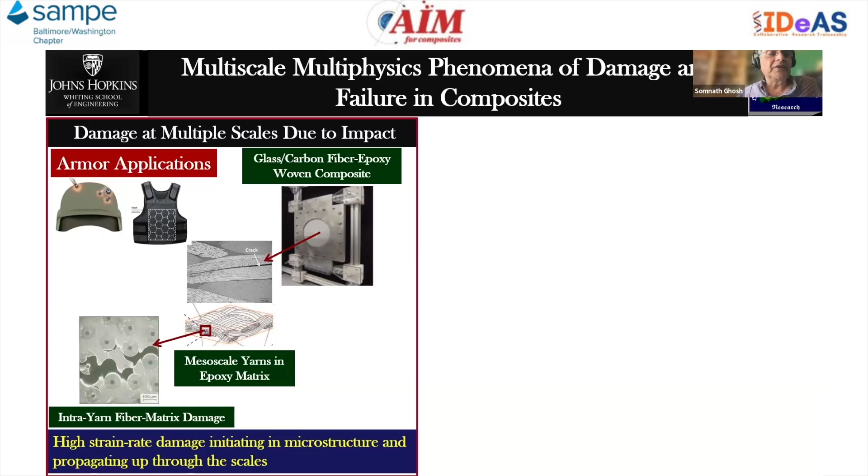These are mesoscale yarns in an epoxy matrix, and within each of these yarns, I see intra-yarn fiber matrix composites. Typically when you have damage, high strain rate damage initiates in the microstructure and propagates through the scales to cause failure of the overall structure at the macroscopic level. So this is a phenomenon of multiple scales involved in the damage process.

What I'm going to focus on today is the non-destructive evaluation of evolving damage sensing in structural components. For example, this is an aircraft made of composite material. Typically, the failure or damage process starts deep down in the microstructure in the form of fiber breakage, matrix cracking, and so on, and then it moves up the scales to manifest as the overall failure of the structure.

Typically, different NDE techniques have been used. For example, this shows a built-in sensor network involving actuation and measurement, consisting of a sensor network together with diagnostic hardware and analysis software. This other one corresponds to sensor data acquired through eddy currents. Typically, these sensor signals are processed in a posteriori fashion, meaning after the operation.

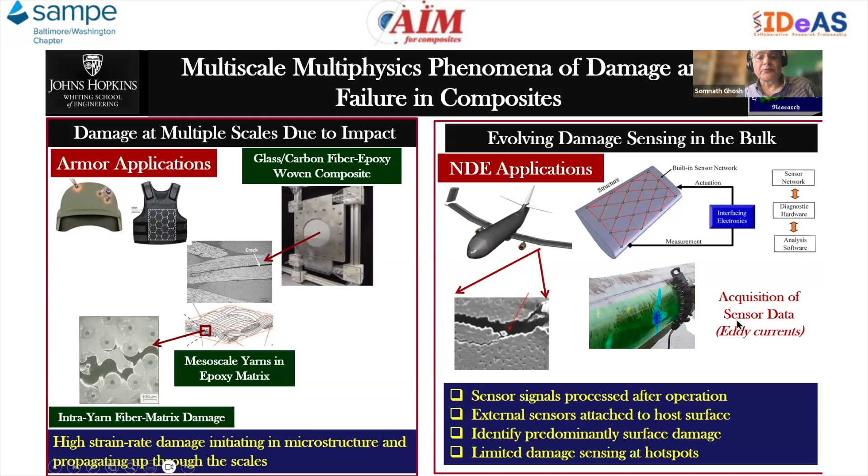So the objectives of model-based predictive platforms for composite structures and materials have multiple prongs. The first is multi-scale damage evolution in composite structures, with multi-level and mesostructural linkages existing in these evolutions.

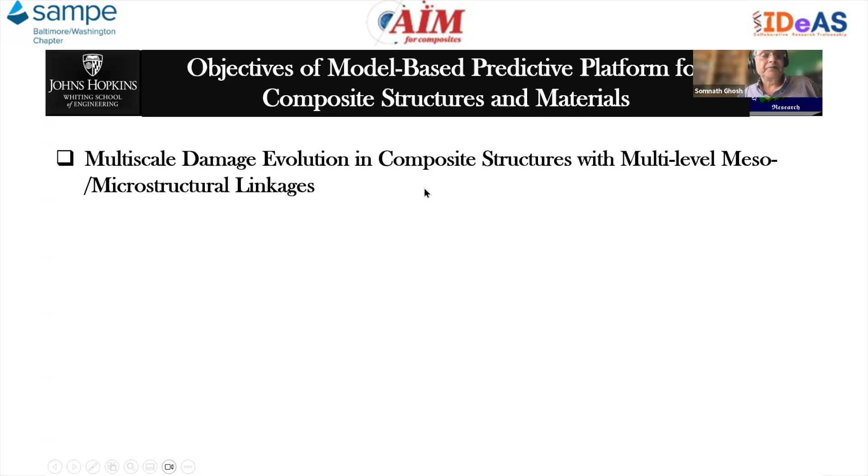The next objective is that ubiquitous damage sensing is necessary, especially subsurface at the source, because by the time damage manifests at the surface, it may have already grown to failure.

And the third objective of these model-based platforms is to understand the evolving phenomena such that one can facilitate location-specific material and especially microstructure design.

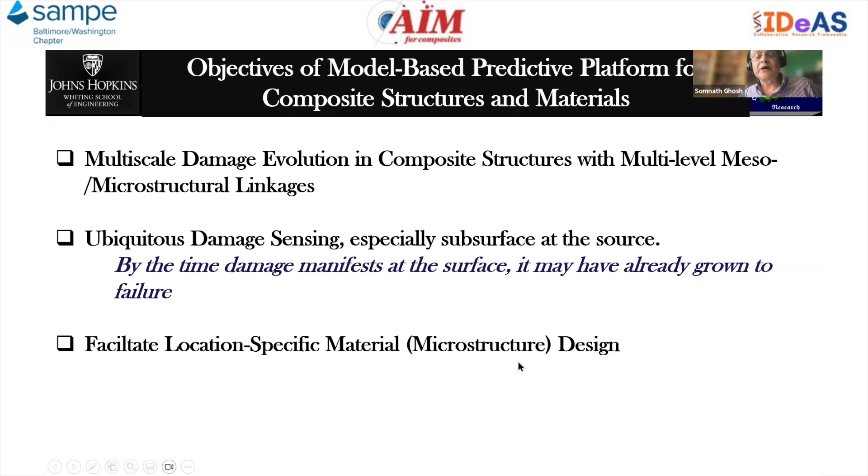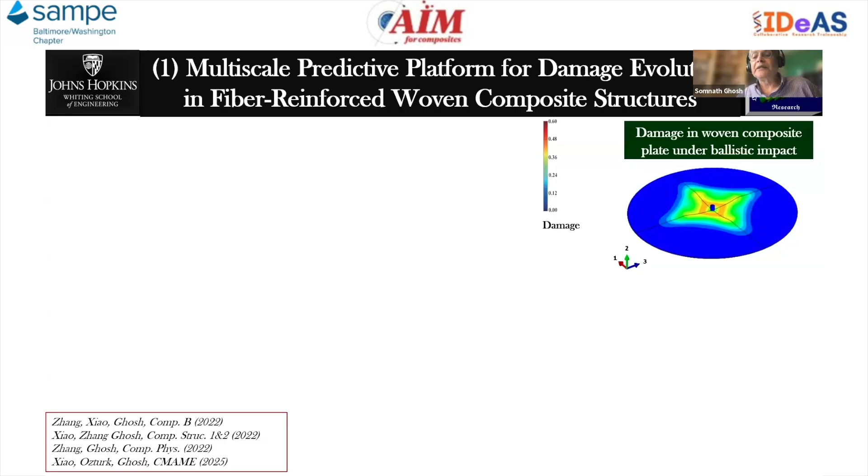Now this corresponds to a multi-scale predictive platform, a pure predictive platform that I'm talking about for damage evolution in fiber reinforced woven composite structures. So like I showed before, this corresponds to a woven composite plate under ballistic impact.

Actually, we worked on this together with Army researchers who were working at the University of Delaware at that time.

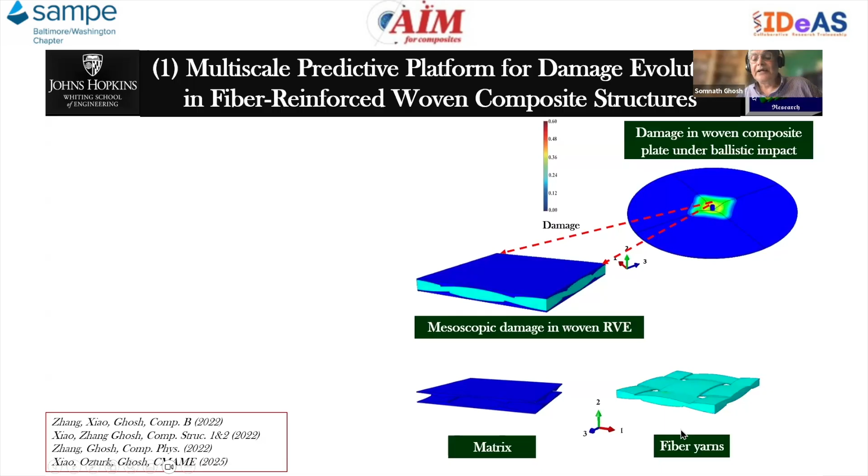So at the mesoscale, this corresponds to the evolution of mesoscopic damage in the woven RVE. And if I look further down, I see this corresponds to the matrix with matrix damage, and then there are these fiber yarns. And if I look inside of these yarns, I do see this fiber matrix composite microstructure, and actually the damage is starting through mechanisms of matrix cracking, interfacial debonding, and such at this scale.

So the link between these scales is very important, because one really needs to connect the lower scale damage phenomena, or lower scale damage and failure phenomena, to the failure phenomena happening at the higher scales.

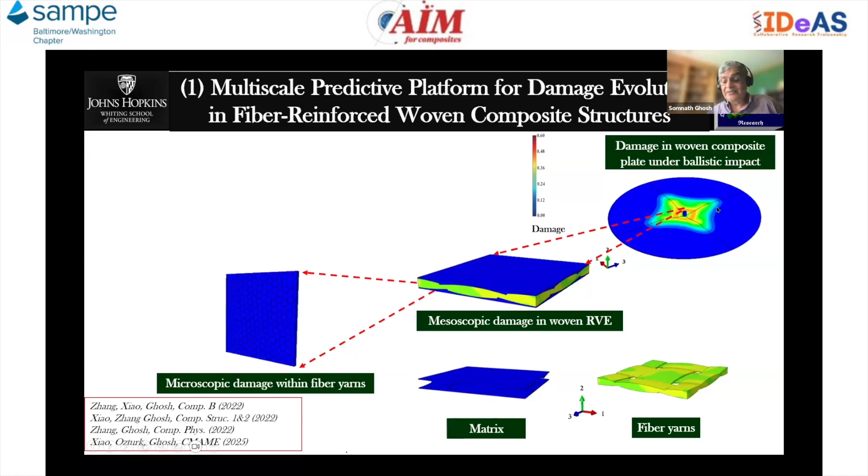Now, in order to get a fast, full field prediction, full field reconstruction of this coupled electromechanical damage fields, it's a good idea to incorporate machine learning, because machine learning has various good attributes for developing these fast, efficient surrogate models. So we can use certain machine learning techniques, and I'm going to go into that in detail.

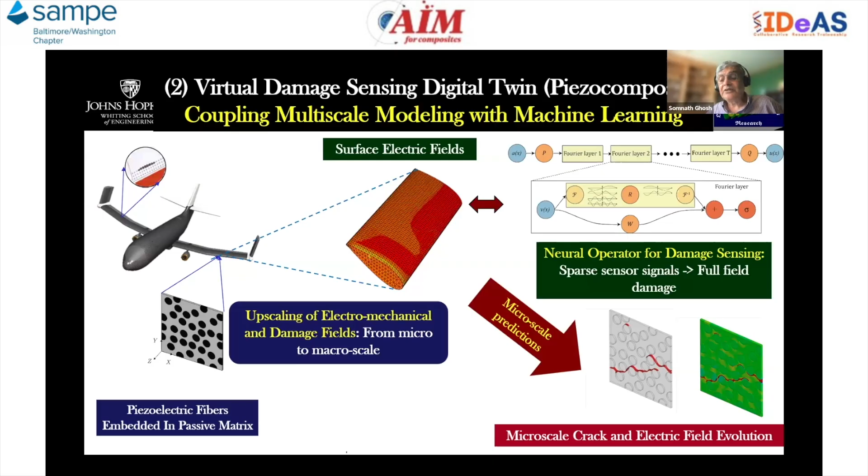When you connect these multiple scales, typically various homogenization methods have been used, and many of them suffer from a number of disadvantages. For example, many are not suitable for complex nonlinear material behavior, such as anisotropy, tension-compression asymmetry, that is typical for many of these materials, especially under fatigue load.

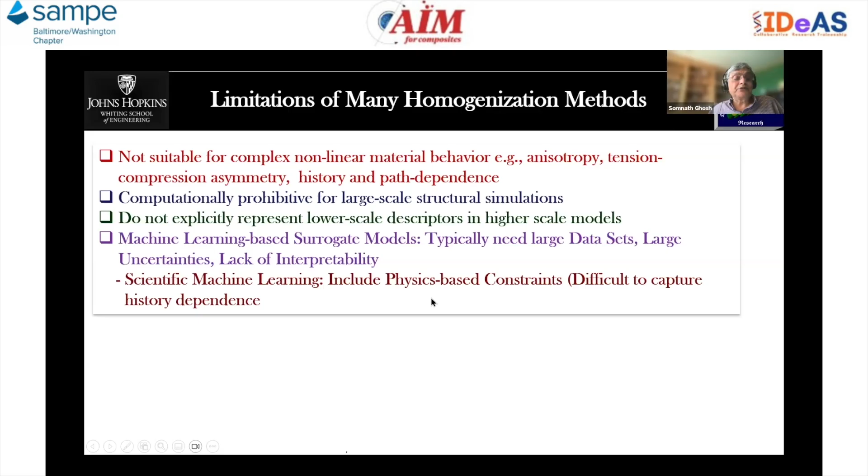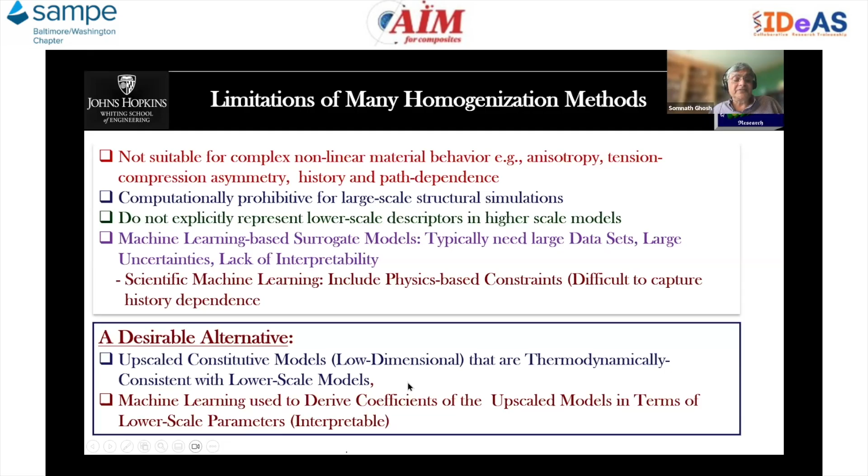History and path dependence. Many of them are computationally prohibitive for large-scale structural simulations and do not explicitly represent lower-scale descriptors in higher-scale models. Machine learning-based surrogate models typically need large data sets, have large uncertainties, and lack interpretability. Today there are scientific machine learning methods which include physics-based constraints, but many of them still suffer from the difficulty to capture history dependence.

A desirable alternative is to upscale constitutive models, which are low dimensional, that are thermodynamically consistent with lower scale models. Machine learning is used to derive coefficients of these models in terms of lower scale parameters, making them interpretable. This is something we've been working on, called parametrically upscaled constitutive models, or PUCMs. They represent higher scale constitutive models that are thermodynamically consistent with lower scale model responses for dissipative irreversible processes, with explicit parametric representation of lower scale morphology.

It could be, for example, crystallography or general morphological descriptors. We call them RAMPs. This is a canonical form. Now the overall form, including the set of higher scale state variables, for example strain rates, work, plastic work, temperature dependence, that evolve with deformation and failure, are governed by the second law. For example, one can use the Helmholtz free energy and minimize it to obtain this form.

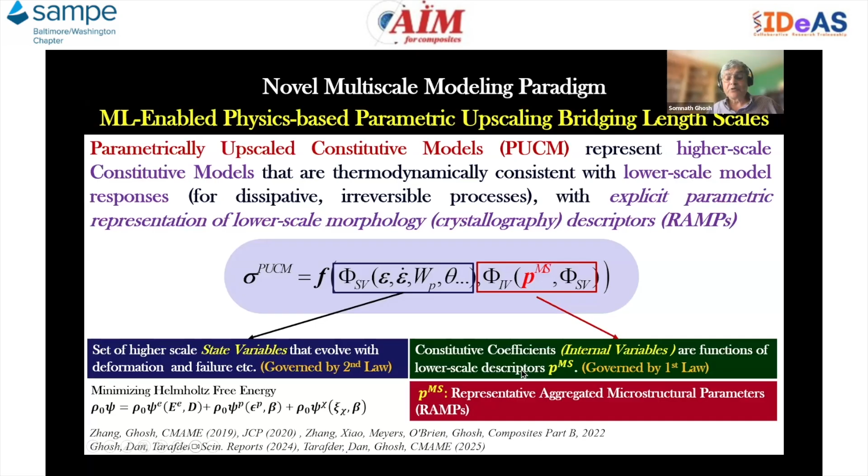But this is more important here: the constitutive coefficients are coefficients of internal variables. These are internal variables that are functions of lower scale descriptors. When I say lower scale descriptors, I'm addressing them as representative aggregated microstructural parameters, which we call RAMPs. The RAMPs represent lower scale descriptors, and I'm going to give an example of this. This part is governed by the first law.

To build the parametrically upscaled coupled constitutive damage mechanics models, what we need first is to identify the RAMPs, the representative aggregated microstructural parameters. We also need to, corresponding to given microstructural RVEs or statistically equivalent RVEs, create a microscale response database, which can come from micromechanical modeling.

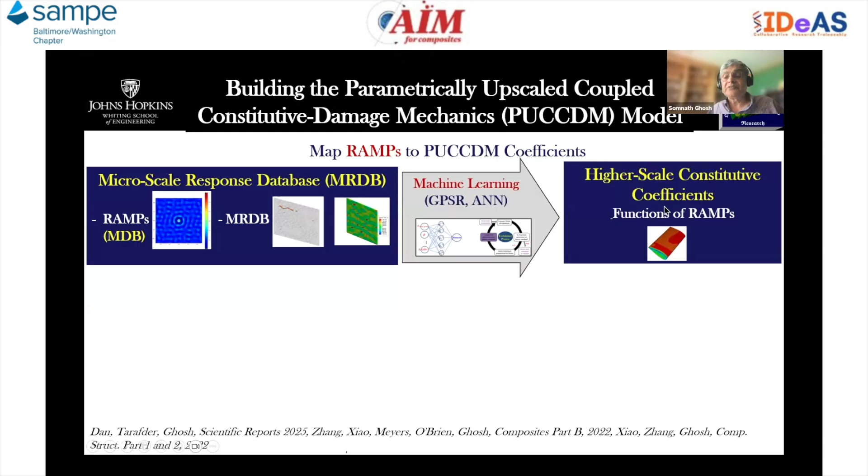We use this data together with machine learning, for example genetic programming based symbolic regression or ANN techniques, to generate these higher scale constitutive coefficients. The constitutive law itself is set by thermodynamical equivalence or consistency, but the coefficients, instead of doing an inverse analysis from experiments, we use machine learning to develop functional forms of these constitutive coefficients in terms of the RAMPs representing the lower scale material descriptors.

So the advantages are: machine learning tools create physics-informed constitutive parameters as functions of lower scale descriptors, making them interpretable. A much smaller database is required for training these constitutive parameters because of thermodynamically bound windows, and they're readily incorporated in commercial codes. As a matter of fact, we've been distributing some of our models through UMATs to our industrial collaborators. Reduced number of variables make them several orders of magnitude more efficient, but with very comparable accuracy.

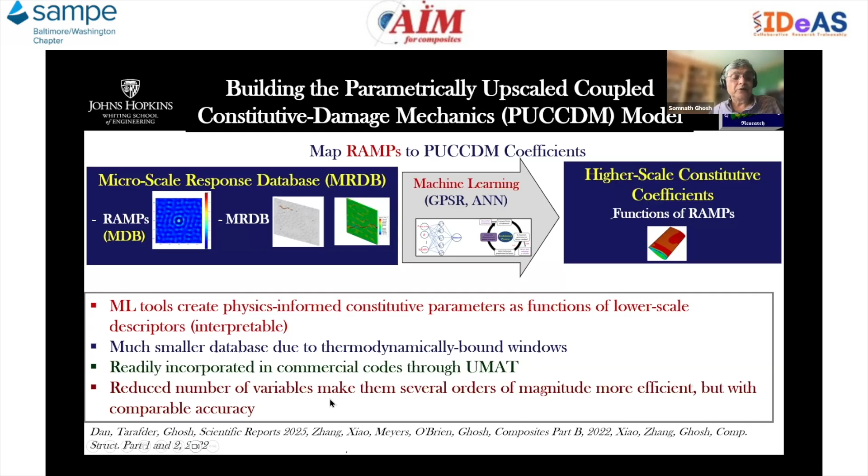So now to build this, it's a two-way approach. The first is the bottom-up, hierarchical approach. We start with the micromechanical models. We identify the micromechanical regions, statistically equivalent RVE regions. We identify the RAMPs, and we use these micromechanical models for generating the MRDB, the microscale response database.

Then we use machine learning to come up with these parametrically upscaled models. Once we have that, those models can be used to generate training data for machine learning based methods, and I'm going to use two types: one corresponds to LSTM methods, the other to neural operators, to basically predict the full field.

State variables corresponding to mechanical, electrical, as well as damage variables throughout the computational domain, using these neural operators. From that information, I can zoom in to generate microstructural damage fields or electrical fields. Importantly, I'm placing equivalent sensors, which can correspond to electrical field measurements at selected points on the surface. We've developed a genetic algorithms-based sensor network optimization tool to generate the optimal location and numbers of these sensors, so from a limited number of sensors we can generate the full field state variables in the computational domain. That's the top-down macro to micro analysis.

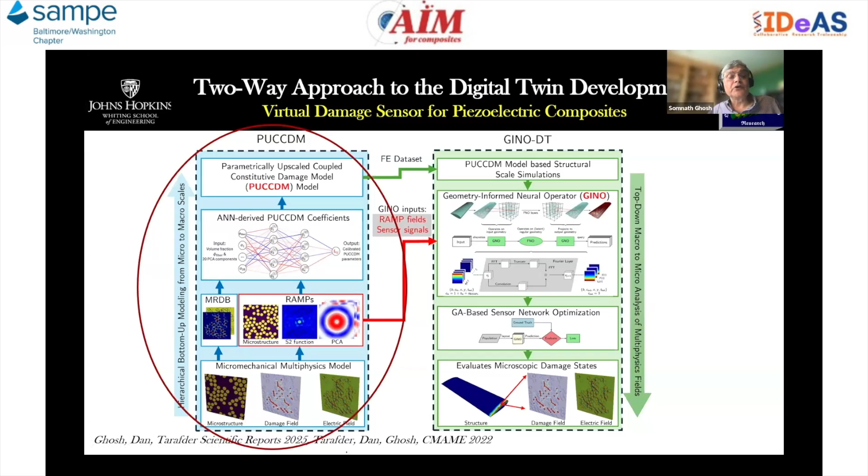I'm going to try to move through this a little fast because it's quite elaborate, this process. So this is the generation of these methods.

From the microstructure, we first do characterization and data generation methods. From that, we generate the RAMPs, the representative aggregated microstructural parameters. Then from the evolution of deformation, damage and electrical fields, we generate this microstructural response database. And then we use data-driven techniques plus thermodynamics.

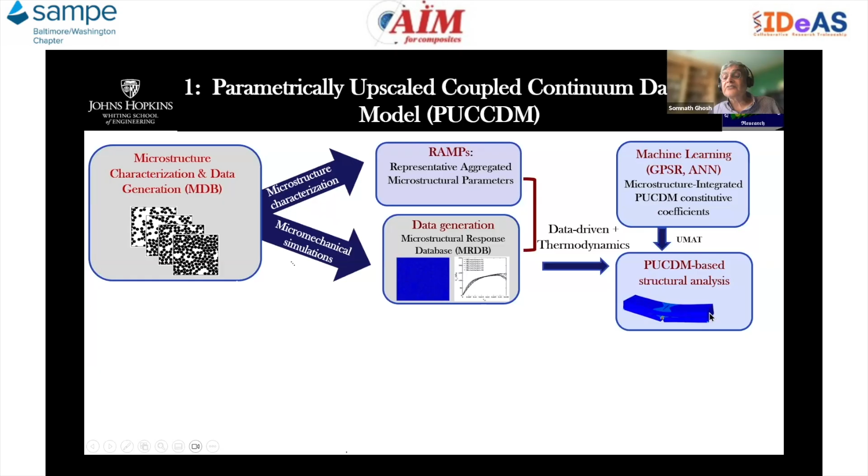The data-driven techniques will be necessary for my machine learning techniques to operate on, to generate these PUCCDM constitutive coefficients. Based on that, we will have the PUCCDM constitutive models that can be inserted in any structural analysis, to actually do the structural level analysis with direct linkages to the microstructure.

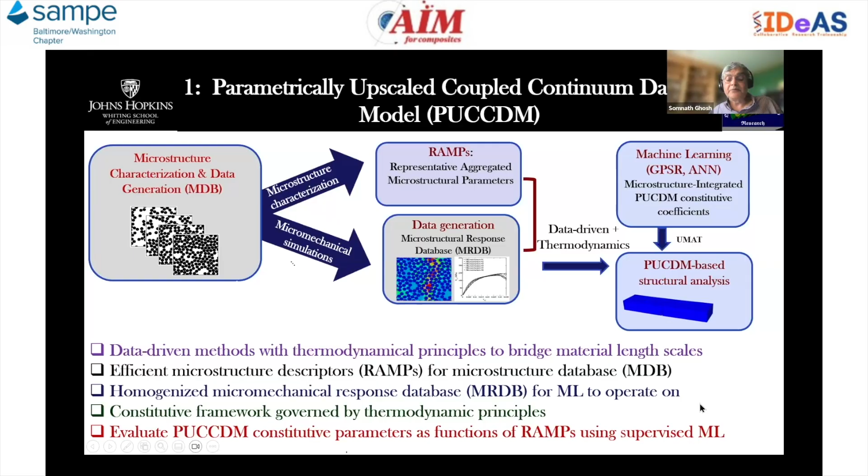The advantages are that data-driven methods with thermodynamic principles are used to bridge material length scales, with efficient microstructure descriptors in the form of RAMPs for the microstructure database, and a homogenized micromechanical response database for machine learning to operate on. The constitutive framework is governed by thermodynamic principles, and we evaluate the PUCCDM constitutive parameters as a function of RAMPs using supervised machine learning techniques.

A little bit about the micromechanical analysis. The micromechanics consists of the fibers, or multiple phases - the fibers in, let's say, a polymeric matrix. In this particular problem, I'm modeling it as an elastic, finite deformation elastic matrix material. So this is for the mechanical problem.

For the electrical problem, we have electrical fields associated with large strains, and damage due to electromechanical states because of interfacial debonding, fiber breakage, and matrix cracking. For the electrical field, we have an energetically consistent electrical crack face condition, where the electrical field can permeate through the medium in the crack gap.

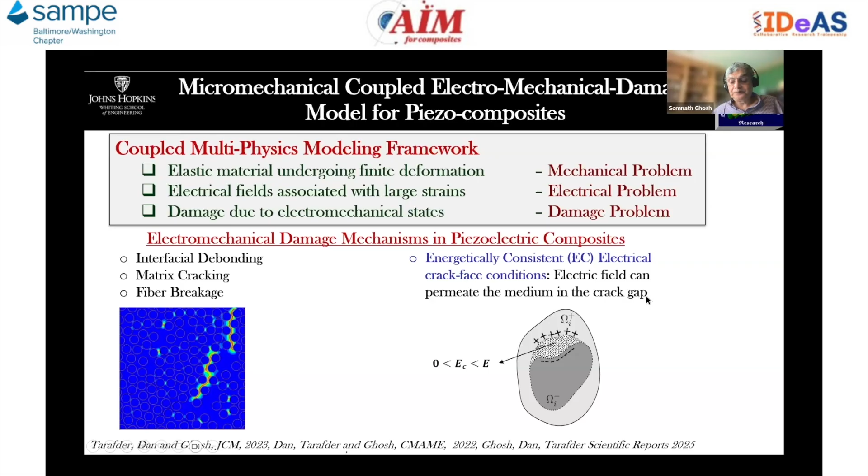We use a phase field model. A phase field model is a regularization of the sharp crack, as you can see here. The advantage of the phase field model for modeling matrix cracking, as well as this cohesive zone-based phase field model of the fiber matrix interface, is that in the matrix it implicitly tracks the crack path, eliminating the need to introduce cohesive elements in the general matrix, and the electrical crack face condition can be incorporated using the phase field order parameter.

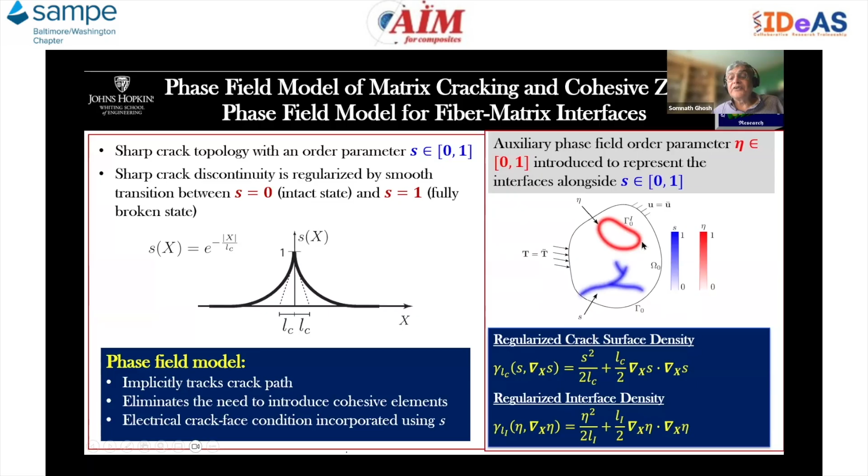The other advantage of the phase field is that I can introduce interfaces using the phase field, the other order parameter. One is the order parameter S, used for modeling matrix cracking - this is a regularized, diffuse crack. And this is a diffuse interpretation of the interface, using my variable eta to represent it.

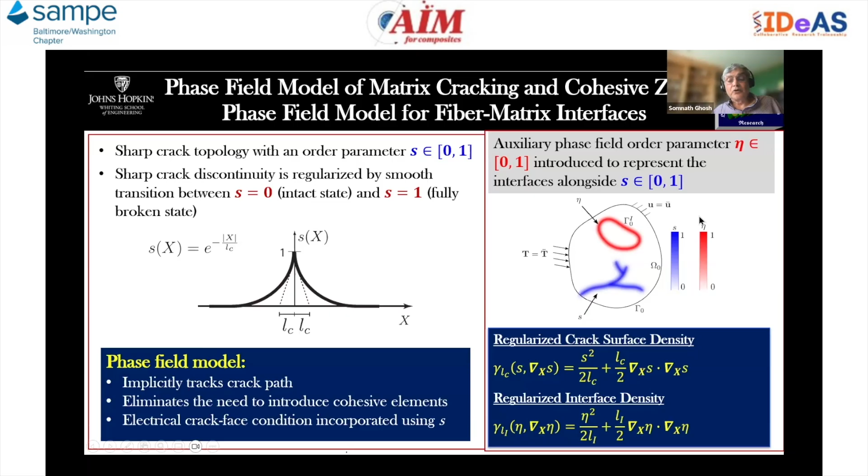The eta variable represents my interfaces corresponding to the fiber matrix interface. These are some of the kinematics that represent both the deformation as well as the gap opening due to interfacial decohesion. I don't have time to go into this.

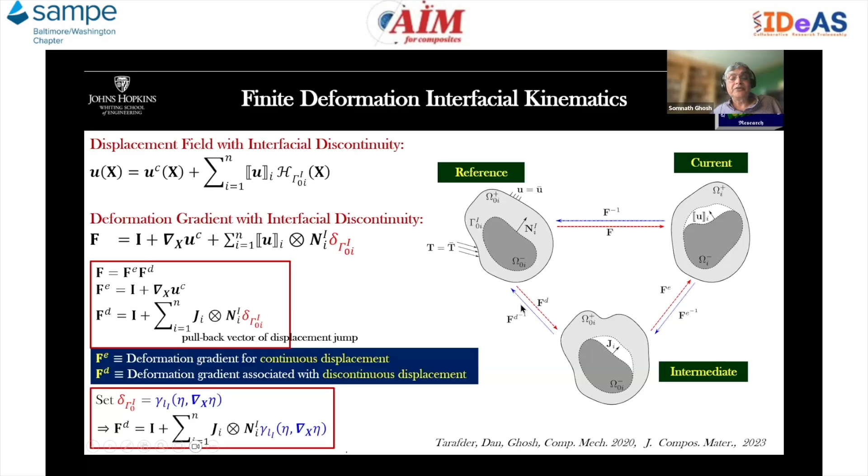These are the governing equations. There are three types of governing equations. One is the balance of linear momentum, or the equilibrium equation corresponding to the displacement field. These are all for finite deformation, as you can see - finite deformation, damage field, and it also couples the electrical field.

The electrical potential field is represented by the Gauss law, and the phase field balance equations correspond to the damage field in the microstructure, also representing the interfacial debonding.

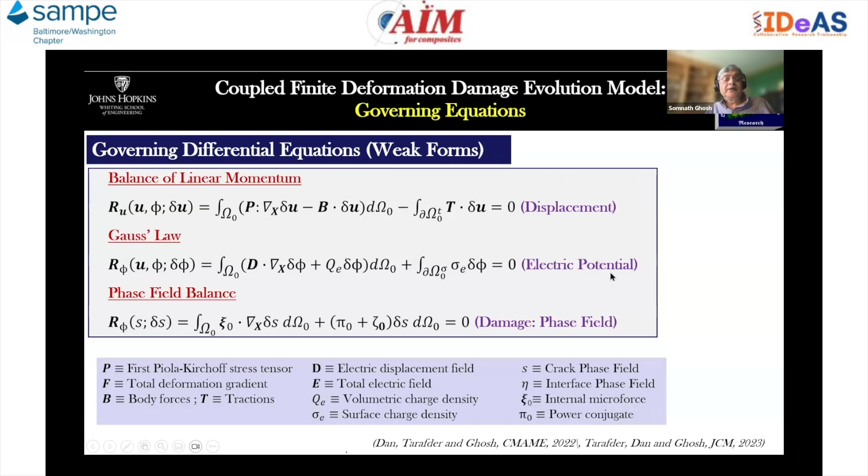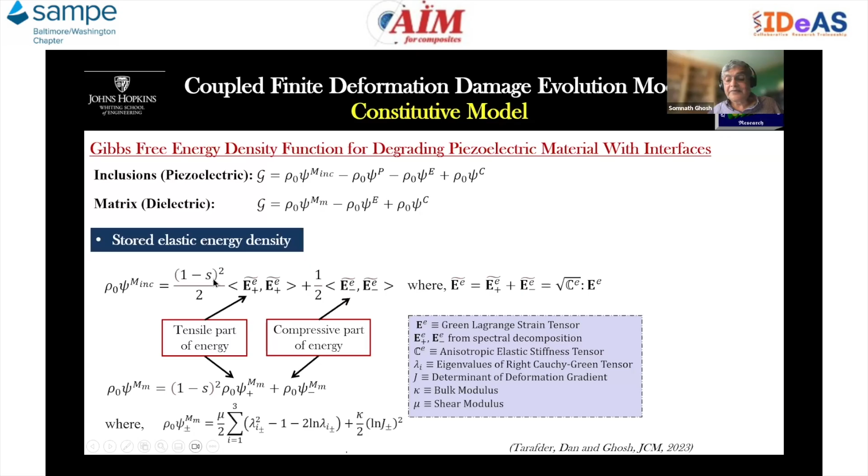The important thing is that the elastic energy also corresponds to tension compression asymmetry, and here the tensile part is actually degrading with the evolution of the order parameter S, which corresponds to the cracking, the fracture in the matrix material. This corresponds to the piezoelectric energy density, the electric energy density, and this corresponds to the crack surface energy density.

The first term here corresponds to the matrix energy density, and the last part corresponds to the interfacial energy density. With the identification of eta corresponding to the interface, we can introduce the cohesive potential and the capacitor energy, because of the electrical fields, into this crack energy.

You can see some of our publications on this for more details.

The eventual constitutive relations can be derived from the Gibbs free energy in the following form. The first one corresponds to the mechanical constitutive law. The second one corresponds to the electrical field constitutive law, and the last two correspond to the crack energy, the internal microforce, and the power conjugate.

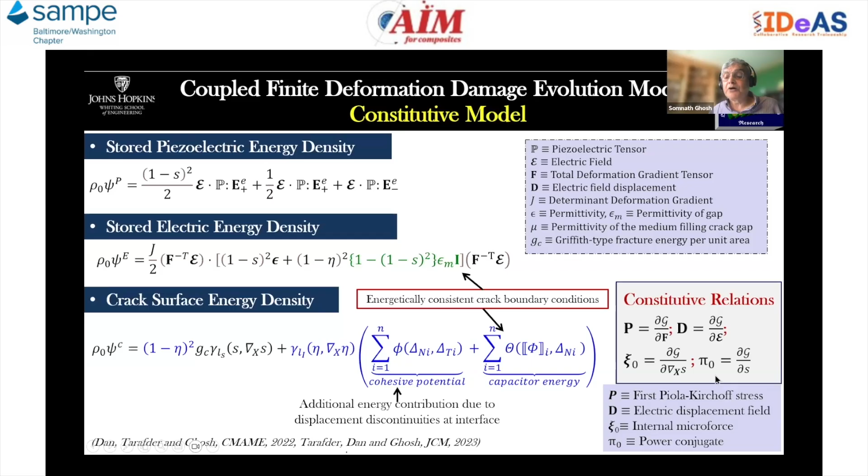So this is a coupled way of solving this multiphysics model, coupling mechanical, electrical, and damage fields.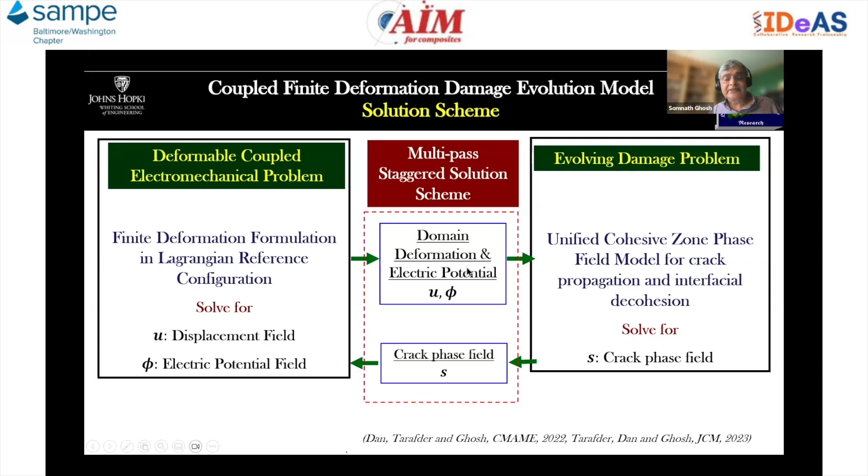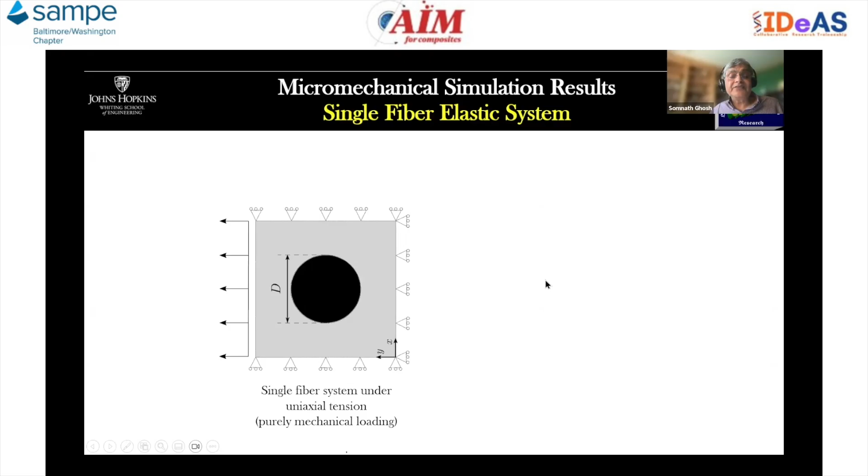I want to emphasize that by doing a cohesive interface modeling of the phase field, we are able to reproduce or replicate experimental observations. For a model like this, it basically consists of one fiber, constrained like this, and we are applying a loading - this is just a mechanical loading. Experiments here have shown, just a minute.

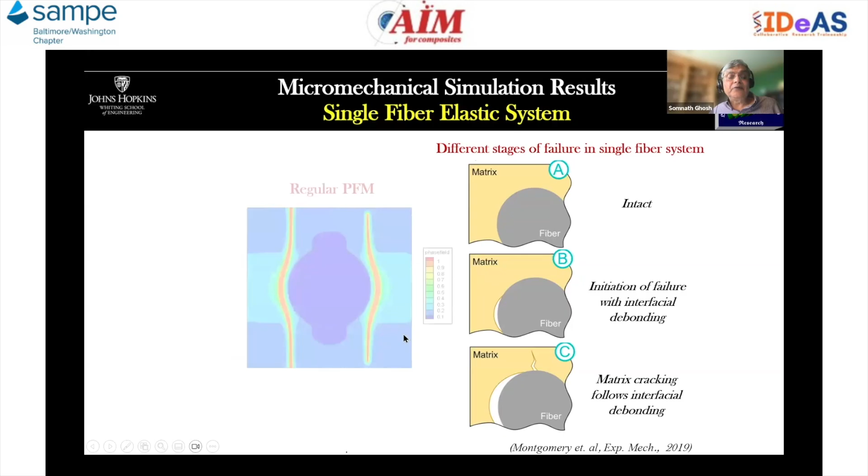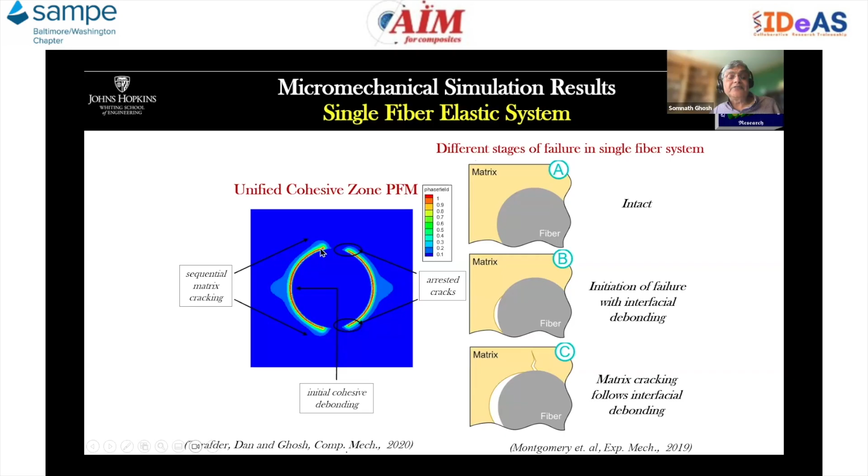Experiments in this paper have shown that the interfacial decohesion is not symmetric. If you use just a phase field model, you would get a symmetric crack propagation prediction. On the other hand, if you incorporate this phase field based interfacial debonding together with the cohesive model, you do see the evolution of the cohesive zone at the interface, which is not symmetric. And this actually matches the experiments quite well.

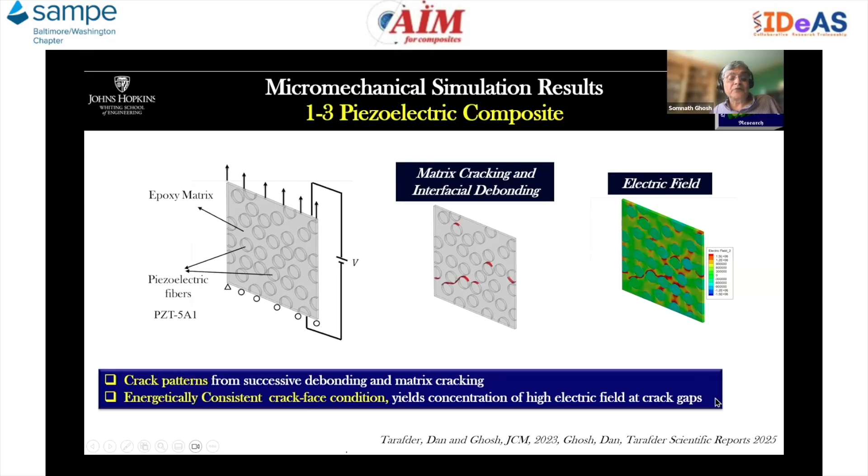Here is a model of micromechanical simulations for a 1,3 piezoelectric composite. You have an epoxy matrix, piezoelectric fibers, PZT5A1, and we are applying both a mechanical load as well as an electrical load. Here you see the evolution of the matrix cracking together with interfacial debonding in the microstructure. Because of the energetically consistent crack face condition, you also see this localization of the electric field in the microstructure, and the crack patterns from successive debonding and matrix cracking is shown here.

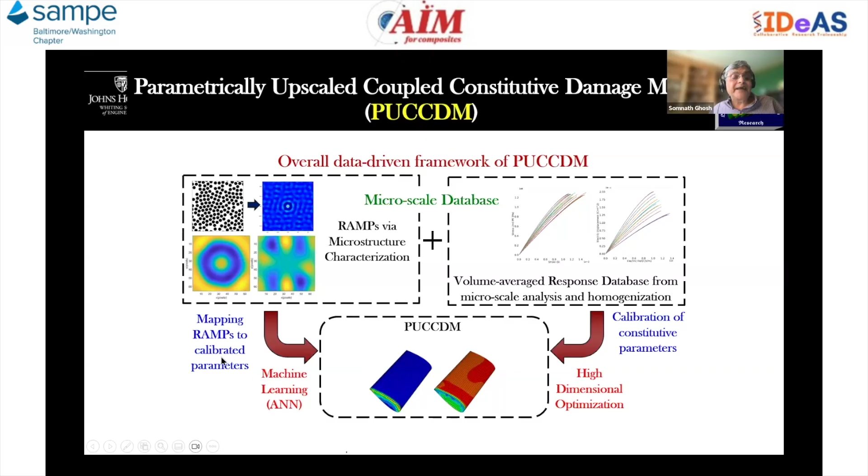So up to that point was a micromechanical model. Now we are going to develop the upscale model, the PUCCDM. For that we need the identification of the ramps from microstructural characterization. We need to establish the volume average response database from microscale analysis followed by homogenization. Then we need to use machine learning using these two data together with the thermodynamical framework to actually map the ramps to the calibrated parameters.

The first step corresponds to the microstructure. This is an experimental micrograph that we are characterizing using the 2-point correlation function, S2, which produces this high dimensional data. This S2 is the probability that if you put a position vector here, a vector here, the head and the tail of the vector R are in the same phase. That is literally the meaning.

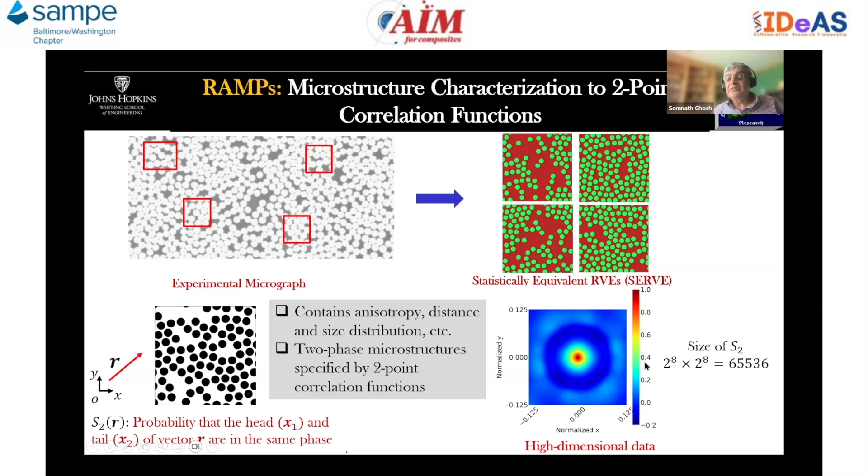It consists of anisotropy, distance, and size distributions, and two-phase microstructure specified by 2-point correlation functions. It's a fairly good representation of these two-phase microstructures. But these 2-point correlation functions generally correspond to high-dimensional data.

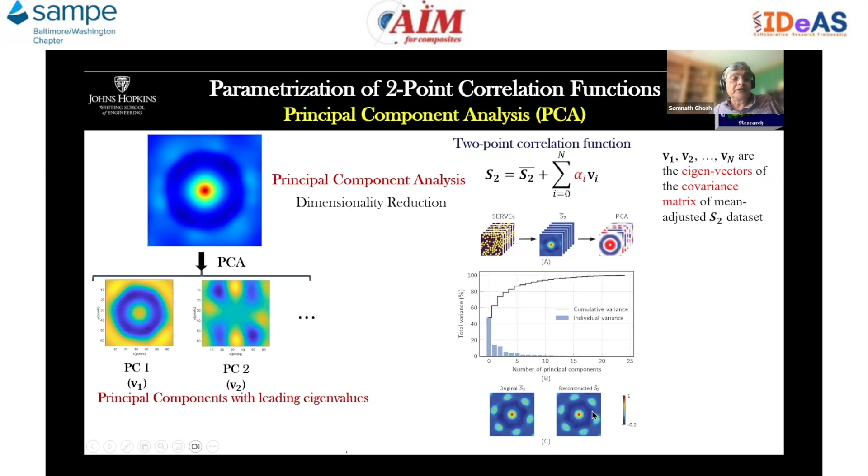So the RAMPs here correspond to the fiber volume fraction as well as the PCA represented S2. These are the alphas.

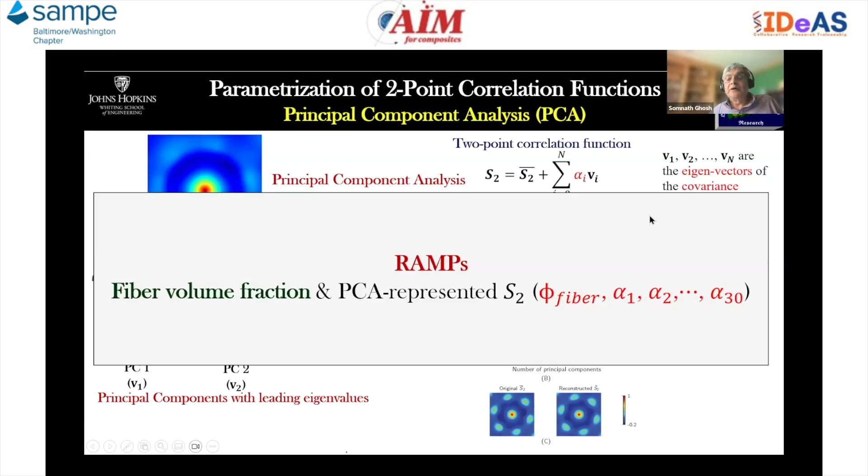Now, the thermodynamically consistent PUCCDM framework consists of the Gibbs free energy representation. The only thing is, now we are representing a homogenized upscale representation. So rather than individually representing or resolving each of the cracks, we represent the aggregated effect in the form of a damage mechanics law. So we have the stored elastic energy representing the aggregate of the microstructural elastic deformation.

Then we have the stored piezoelectric energy density. Again, this is an aggregate, which is actually reducing because of the increase of the damage as the microstructural cracks evolve. Then we have the stored electric energy density and the damage energy density. And then we form the constitutive relations in form of this upscaled Gibbs free energy form. We have the damage potential function representing the onset of the overall damage corresponding to the microstructural damage evolution, and this corresponds to a Kuhn-Tucker condition corresponding to the irreversibility of the damage evolution.

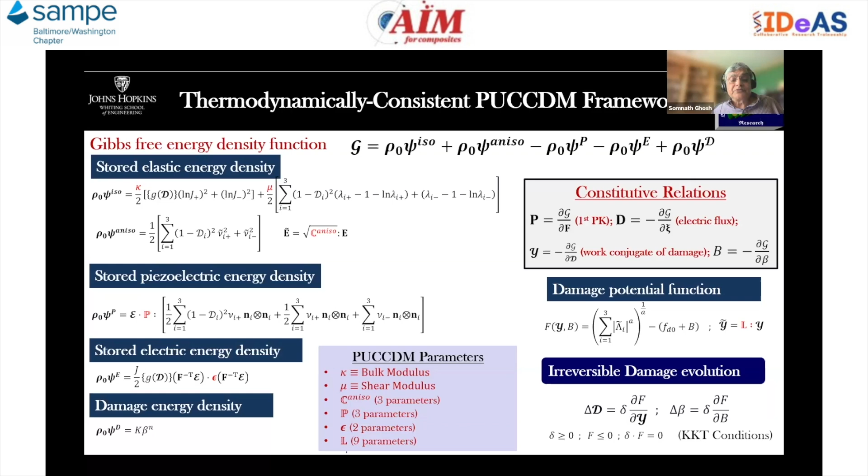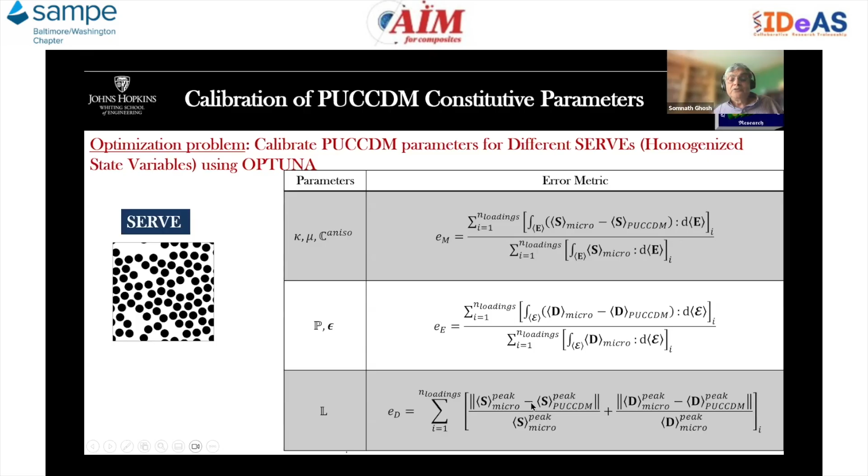To do that, there's a two-step process. First, we set up the PUCCDM parameters from the MRDB using the code Optuna, minimizing the error in the macroscopic load, the electric load, as well as the damage evolution. Then once we have that, we use this artificial neural network to come up with a representation of those various parameters, the PUCCDM parameters, in terms of the underlying microstructural RAMPs.

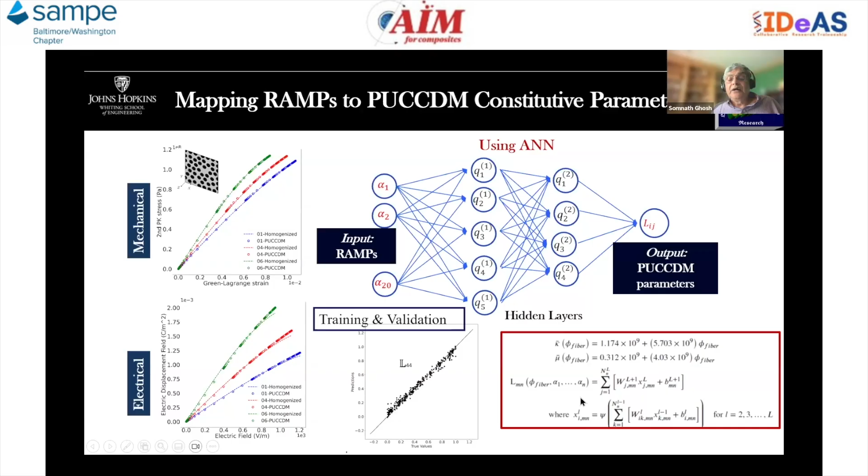So this corresponds to the fiber volume fraction, and this one is a function here. This W is a function of the principal components representing the distributions.

With that, then now corresponding to each microstructure, we can then actually have a pure macroscopic evolution. Here we are showing the evolution at the macro scale associated with the damage evolution. That means this is the evolution of cracks in the microstructure, and this corresponds to the evolution of the principal damage components in the macrostructure, as well as the evolution of the electrical field.

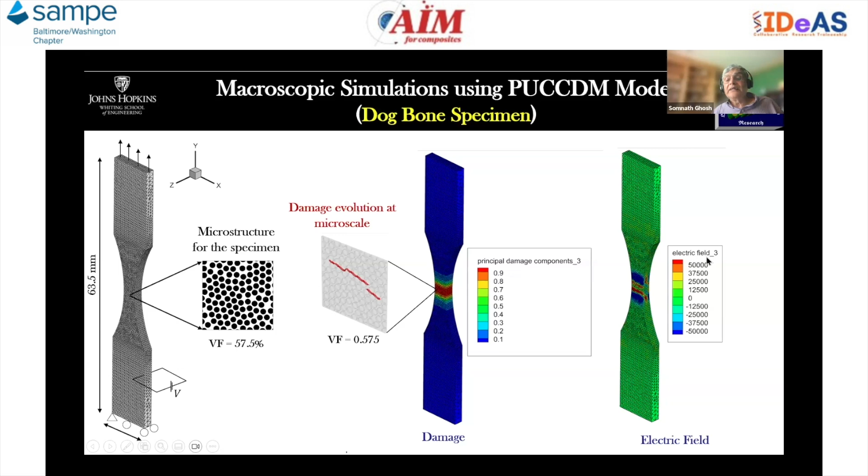Just to show the strong influence of the microstructure on the macro scale response, this is realized through these PUCCDM simulations. This corresponds to the force displacement behavior for different microstructural representative volume elements. The volume fraction affects both the elastic and damage behavior, but even for the same volume fraction, different distributions affect the overall damage response.

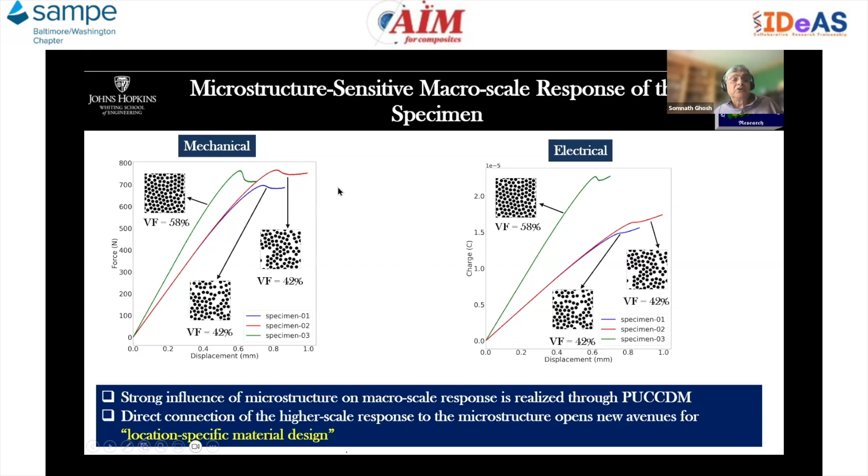This corresponds to the mechanical field, and this corresponds to the electrical field. This is very important if you want to introduce location-specific materials design to improve the damage characteristics of the overall structure.

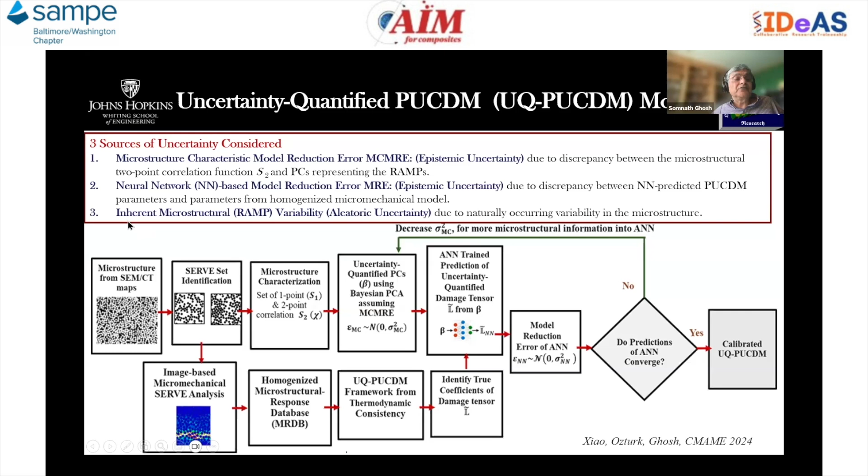Now, I don't have time to go into this, but we have coupled this entire framework with the UQ framework, uncertainty quantification, that takes care of three uncertainties: the epistemic uncertainty of microstructure characteristic model reduction error, the epistemic uncertainty of neural network based model reduction error, and the aleatoric uncertainty of inherent microstructural variability. So all three of them.

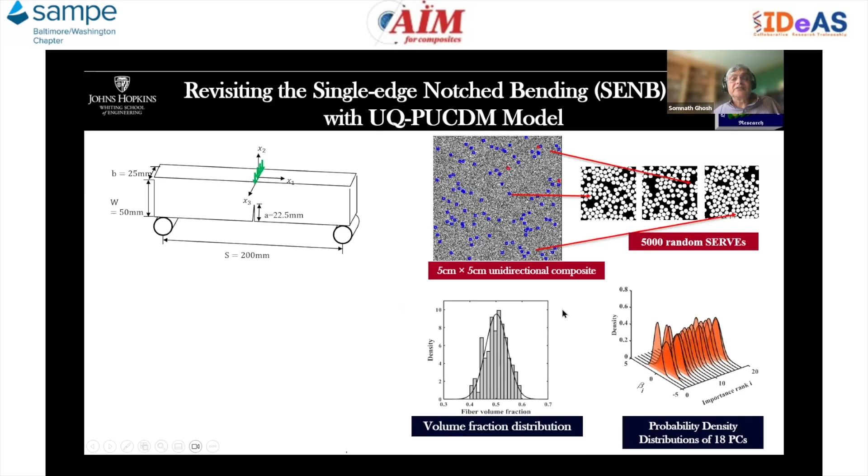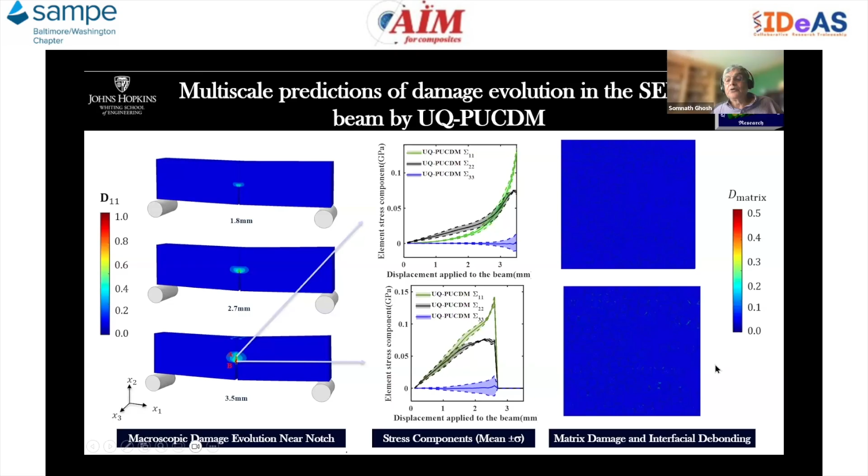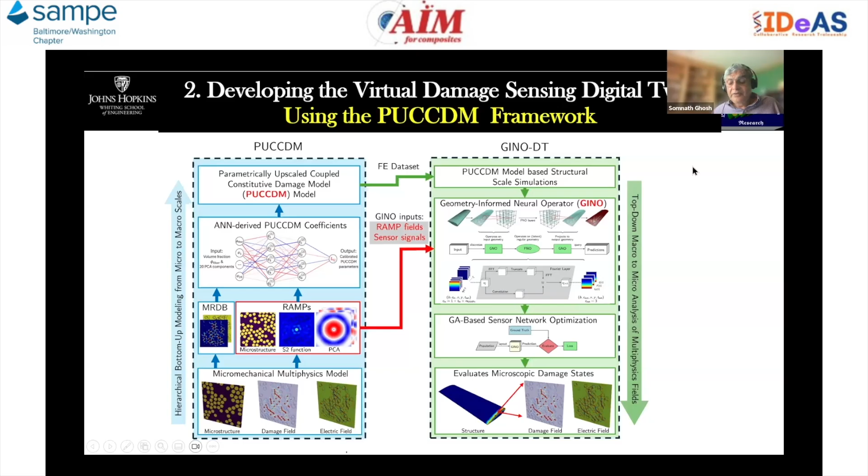Now we go to the last part of this discussion: developing this virtual damage sensing digital twin. As I said, we will use two types of machine learning techniques. These are supervised machine learning techniques to predict the full field state variables from limited surface-based measurements. Here I'm talking about geometry-informed neural operators, but also LSTM-based models.

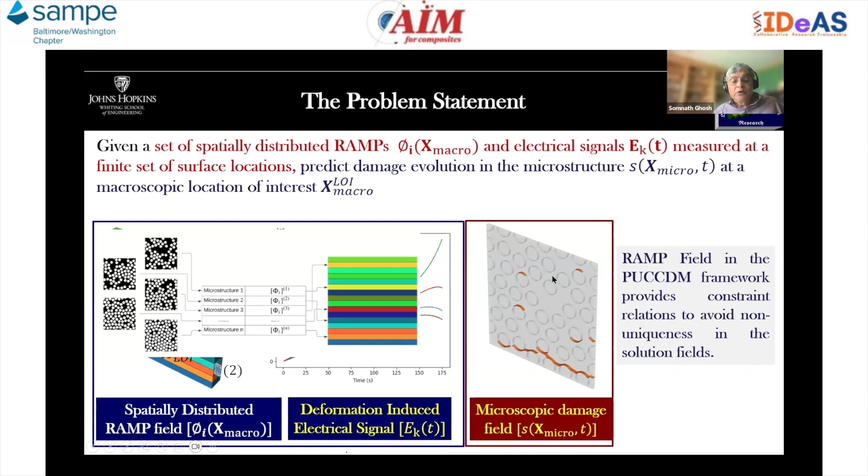The ramp field in the PUCCDM framework provides a constraint relation to avoid non-uniqueness. If you don't have enough of these ramp gradients, then you need a lot more surface-based sensors in order to provide uniqueness in the predictions.

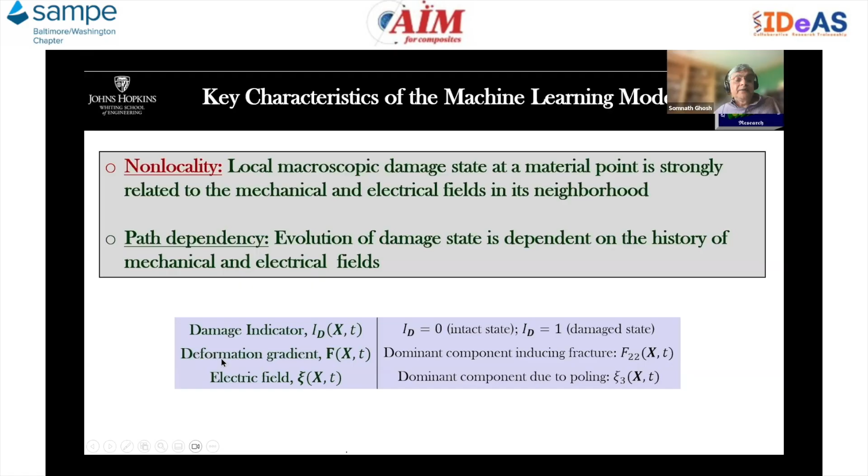So there are three macroscopic fields that we are going to probe as full field variables. One is the damage indicator: ID equal to 0 corresponds to intact state, ID equal to 1 is a damage state. Then the deformation gradient as well as the electrical field.

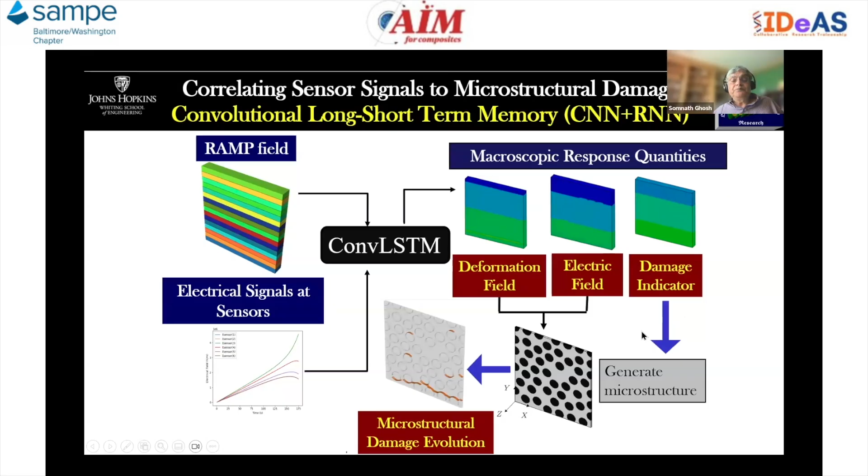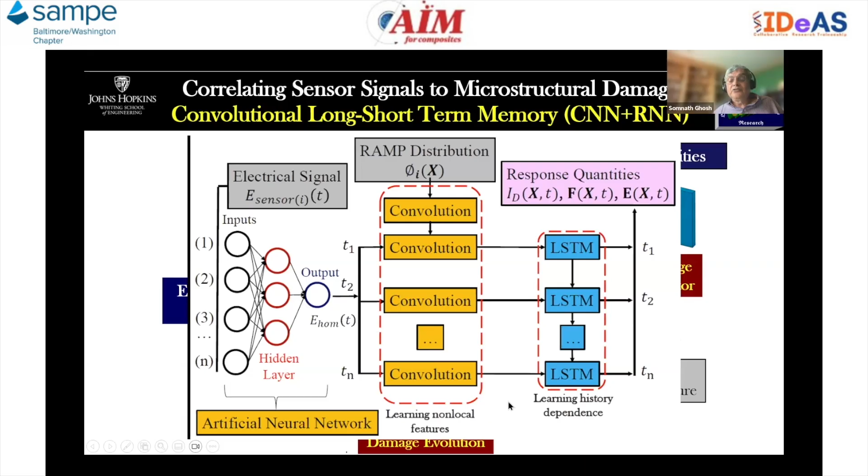This is the architecture: we have this ANN with the electrical signals to output homogenized electrical field, and that is coupled with a convolution with the ramp distributions for learning the non-local features, which is then used with the LSTM network for the output response quantities. This corresponds to learning history dependence.

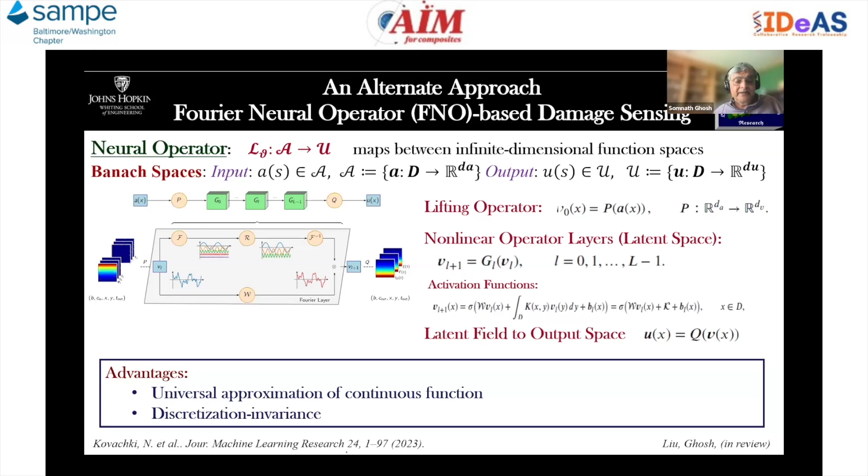The output field corresponds to all the state variables in the entire domain, and this corresponds to the architecture. F corresponds to the Fourier transform. You have a lifting operator given by P, followed by a nonlinear operator layer in the latent space using the Fourier network, and then mapping the latent field back to the output space given by operator Q. The advantage of FNO-based models is that they map between infinite dimensional function spaces, giving universal approximation of continuous functions, and they are discretization invariant, meaning they don't depend on the grid used for training.

If you have various types of geometries, you can couple this FNO with graph neural operators to create GINO, or geometry informed neural operators, that map any given domain onto a regular periodic domain for the FNO layers, and then do an inverse mapping to generate the variables in the actual domain.

So these are the three inputs: the ramp fields, the electrical signal, and the sensor layout. Then you use the FNO-based neural operators to map the response fields, the full field of the response. Once we have that, we can use the damage fields together with micromechanical simulations to probe the microstructural damage evolution.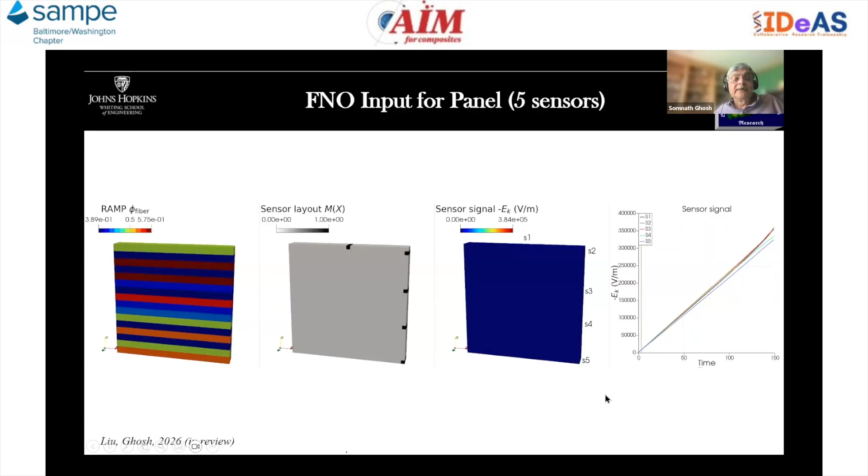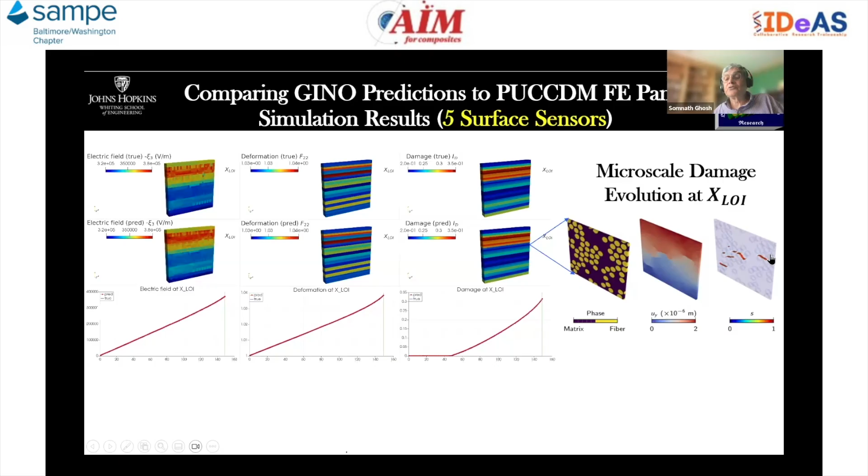We identify a location of interest at which we can recreate the microstructure. This corresponds to the mechanical field, the displacement field, and this corresponds to the damage evolution in the microstructure.

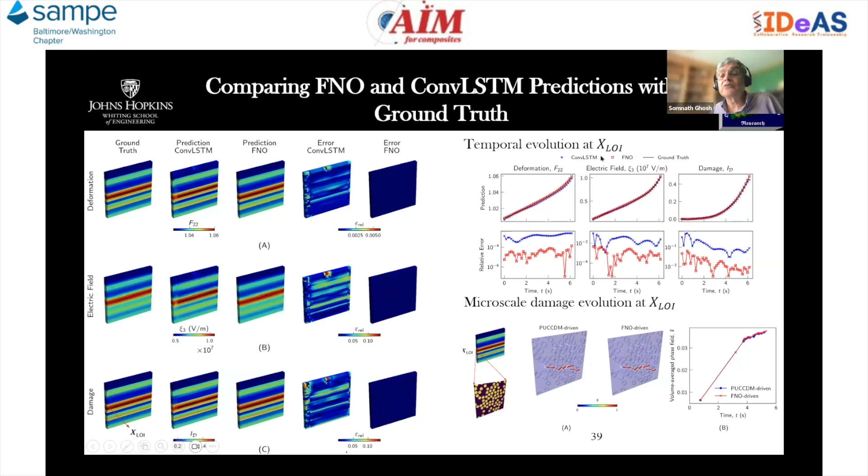This is a comparison of the FNO and ConvLSTM predictions against the ground truth. For the ConvLSTM, there are significant errors particularly near the surface, because of the sparse surface measurements. On the other hand, because we are mapping between infinite spaces with the FNO, the error is very small. This shows a comparison of the relative error as a function of time at a given location of interest. The blue one corresponds to the ConvLSTM, the red one corresponds to the FNO.

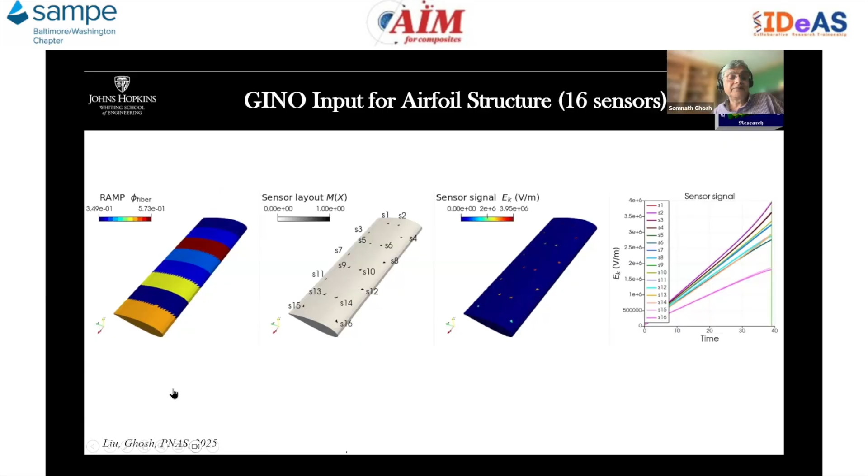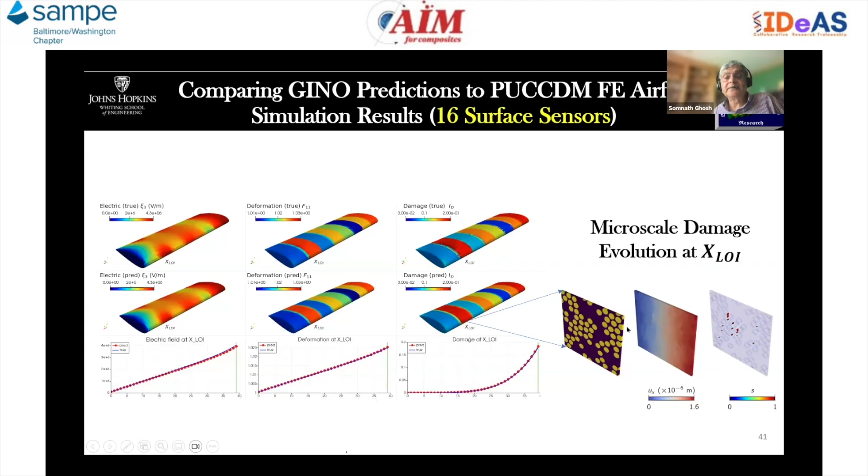If we move from a panel to a domain with an airfoil structure with 16 sensors, this corresponds to the evolution of the electrical field at those sensors. And correspondingly, we have the evolution of the electrical field, the deformation field, and the damage field, comparing the ground truth and the GINO predicted models.

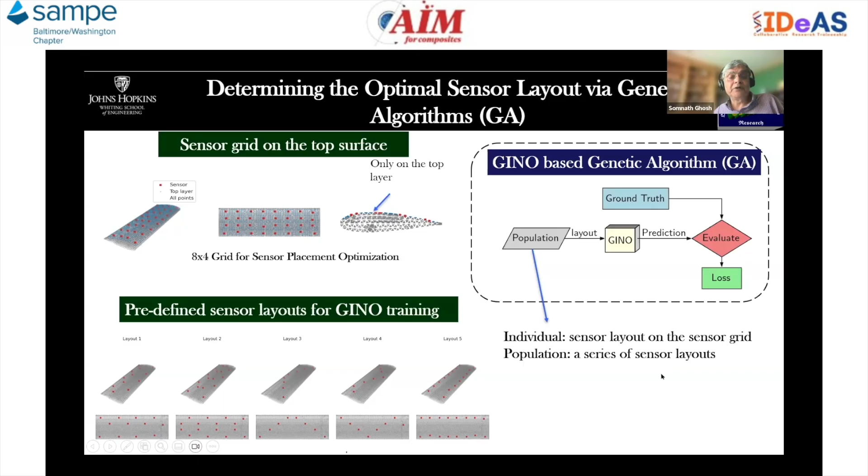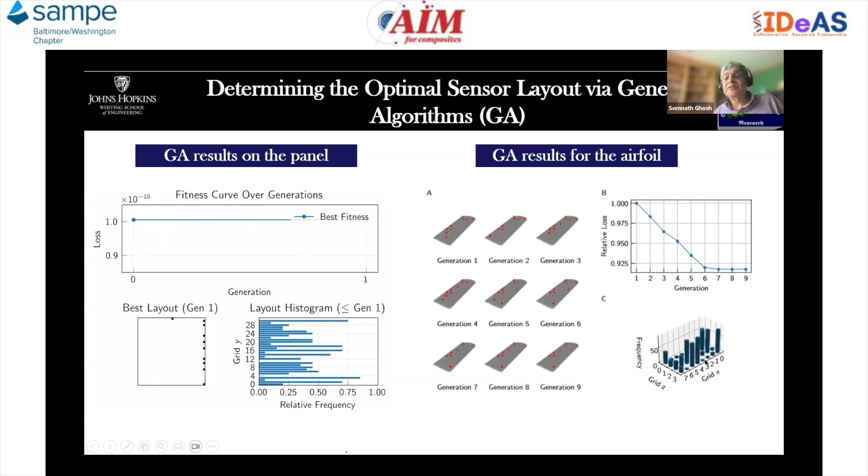The last thing here is we have also coupled this analysis with a genetic algorithm-based optimal sensor layout schema, where you train the genetic algorithm using the sensor placement. This is a sensor grid on the top surface, and these are some sensor layouts. You use this GA to come up with a loss function corresponding to the difference between ground truth and predicted values for different sensor layouts, to find the optimal behavior. These are some sensor layouts for the panel, and these correspond to sensor layouts for the airfoil structure.

I'm going to stop now. So this is the summary.

We believe we have built a novel virtual damage sensor coupling highly efficient physics-based modeling with machine learning for piezocomposites, with strong correlation between the damage and electrical fields. This interface enables virtual full field predictions from limited surface mounted real sensors. A unique deep learning architecture using FNO is used to correlate spatial and temporally varying electrical fields to damage states. Ramps are necessary for unique predictions, and these are important translatable tools with implications in location-specific design. Current steps are being taken to develop this VDS virtual damage sensor digital twin for arbitrary loadings and geometries, incorporating UQ in the framework, and extending this platform to other materials. I'd like to stop there.